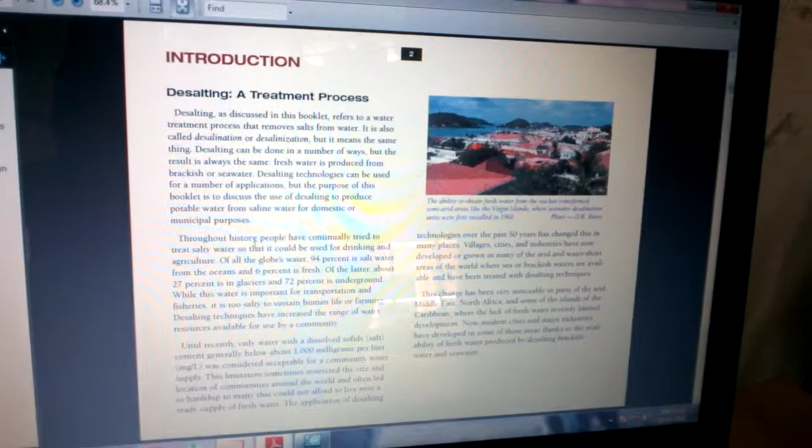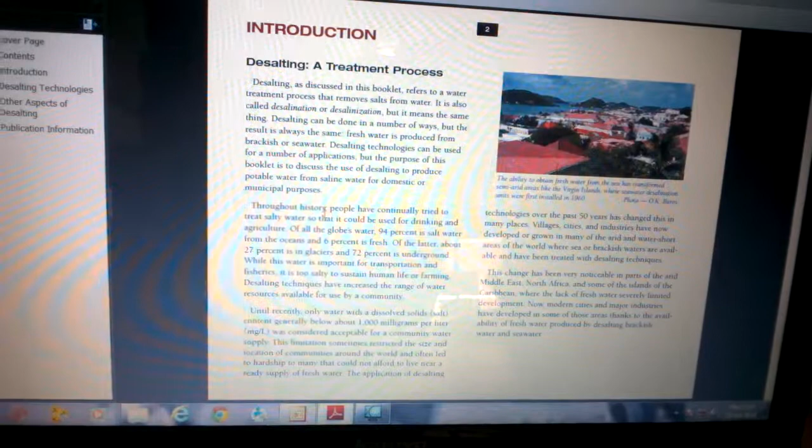First, see desalting technologies. What is desalting? Desalting is a method to treat the water that removes the salt from the water. It is also called desalination, but it means the same thing. Desalting can be done in a number of ways, but the result is always the same. Fresh water is produced from the sea water or brackish water.

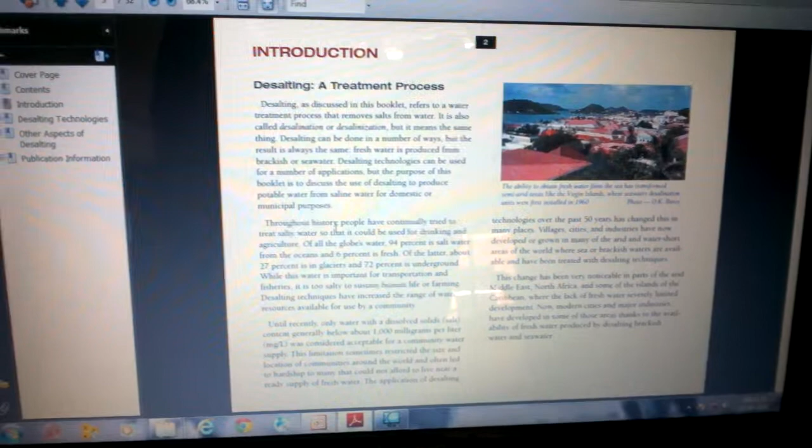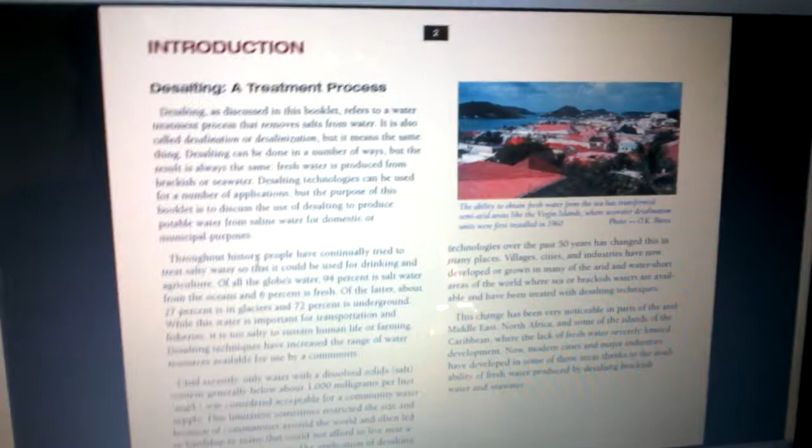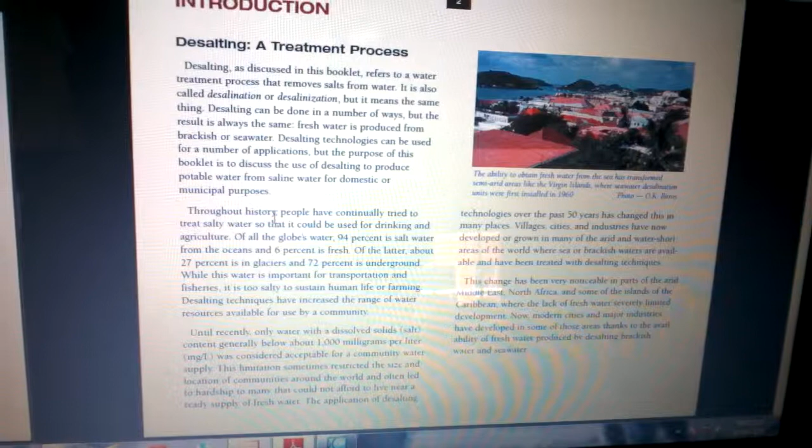Desalting technology can be used for a number of applications, but the purpose of this potable water from the saline water is for domestic and municipal purposes. Throughout history, people have continuously tried to treat the salt water so that it could be used for drinking water and agriculture. Of all the globe's water, 94% is salt water from the oceans and 6% is fresh. Of the latter, about 27% is in glaciers and 72% is underground.

Okay, then while the water is important for transportation and fisheries, it is too salty to sustain human life or farming. Desalting technologies have increased the range of water resources available for use by the community.

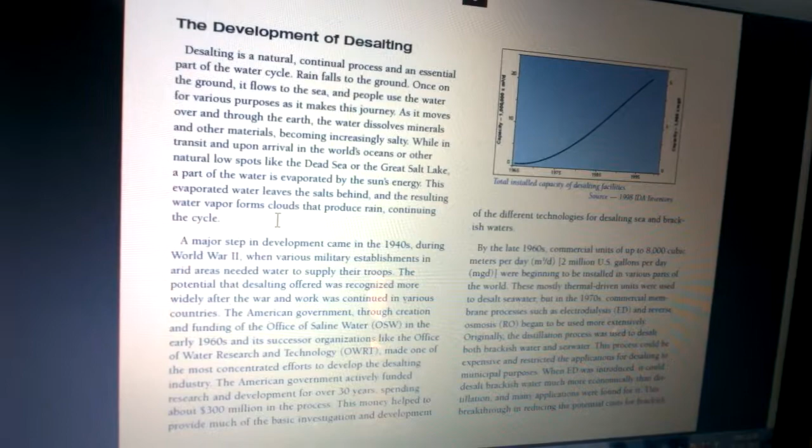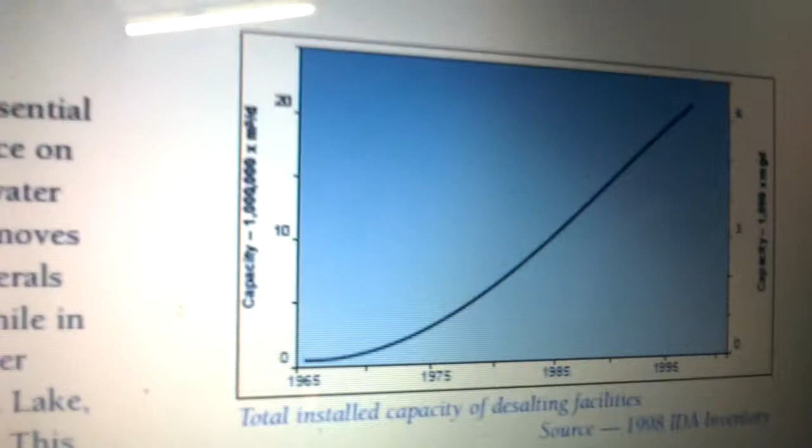Next, in the desalting process, the water cycle is very essential. I would like to say some words on the water cycle. Desalting is a natural, continuous process and is essential to the water cycle. Rain falls to the ground. Once it falls on the ground, it flows to the sea. People use the water for various purposes as it makes this journey.

As it moves throughout the earth, the water dissolves minerals and other materials, so it becomes increasingly salty. While in transit and upon arrival in the world's oceans and other natural low points like the Dead Sea or Great Salt Lake, a part of the water is evaporated by the sun's energy. This evaporated water leaves the salt behind, and the resulting water vapor forms clouds that produce rain, continuing the cycle.

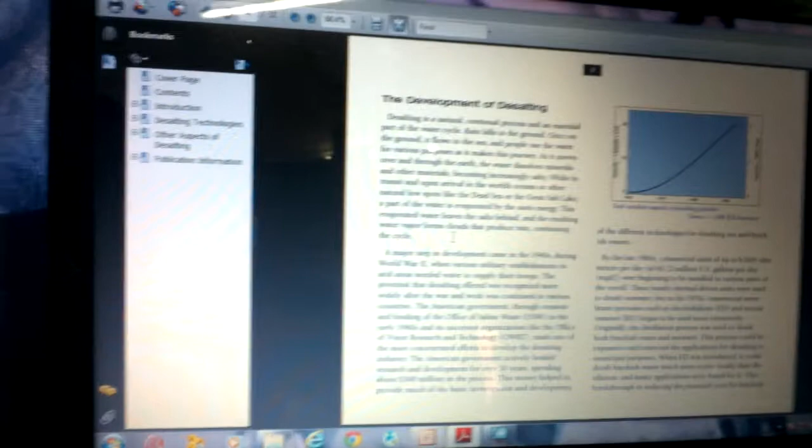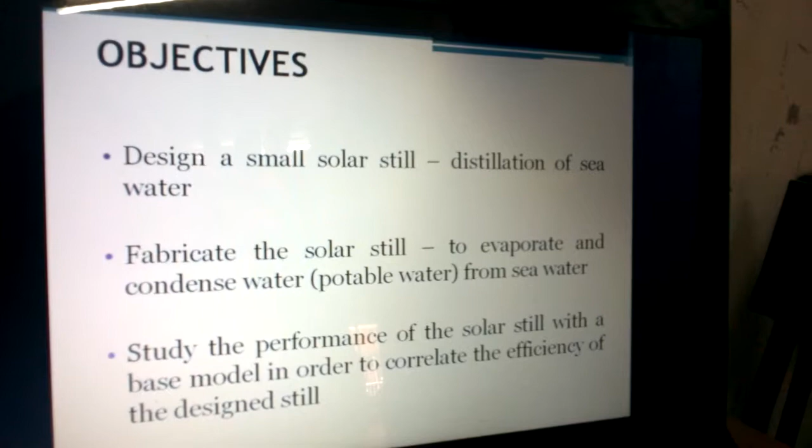Next, see here, our main objective is to design a small solar still for distillation of seawater. Our main concept is to design a small unit because it should be feasible for all people. Low class people, middle class people can buy it, install it in their homes, and produce the water by themselves.

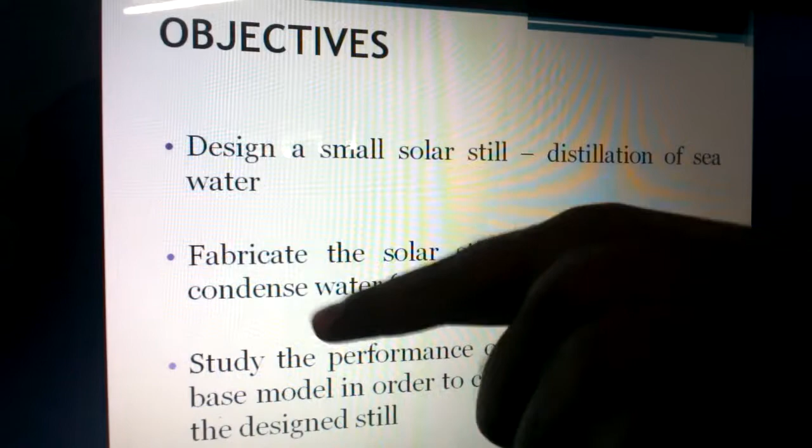Next one, fabricate the solar still to evaporate and condense water from the seawater. That means our project's main aim is to evaporate the salt water, and we can produce the pure water by the condensation process. So our main aim is to improve the rate of condensation and evaporation so that we can produce more pure water.

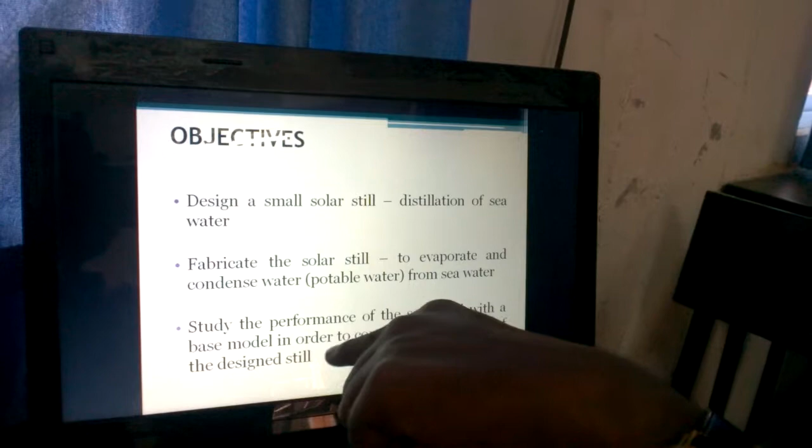Next, study the performance of the solar still with a base model in order to correlate the efficiency of the designed still. Our main aim is to design two setups. First one is the previous setup. It has already been introduced and installed, and used regularly. So we have designed the previous setup.

Next, we are designing our new setup. Finally, we are comparing the results to see which is the best, and showing the result. We are producing more amount of pure water. This is our aim.

So we fabricated the setup again and again, and we improved the result gradually. Next, the fabrication process was completed. After that we started to take down the readings: the temperature inside the setup, the temperature outside the setup, and the temperature in the output area. We noted many readings, and we did the calculation using the Mollier chart.

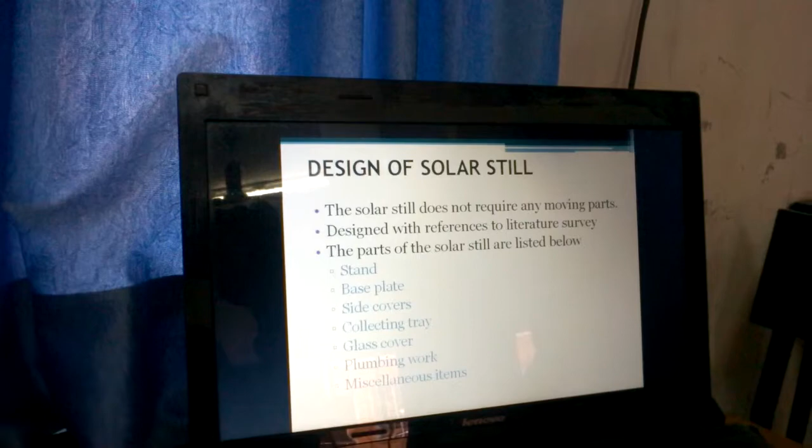Next, design of the solar still. First we completed the design part using CATIA software, as I said before. The solar still does not require any moving parts. Our design does not require any moving parts such as fans. And we designed the setup based on the literature survey, that means previous setups based on the same design, but we have included something different.

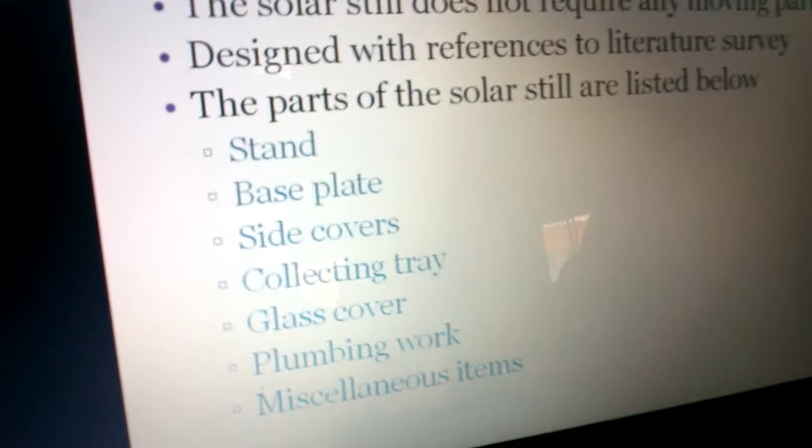The parts of the solar still. Our setup consists of many parts. First, stand; next, base plate; third, side cover; fourth, collecting tray; fifth, glass cover. Next, some plumbing works and hemming works, miscellaneous items.

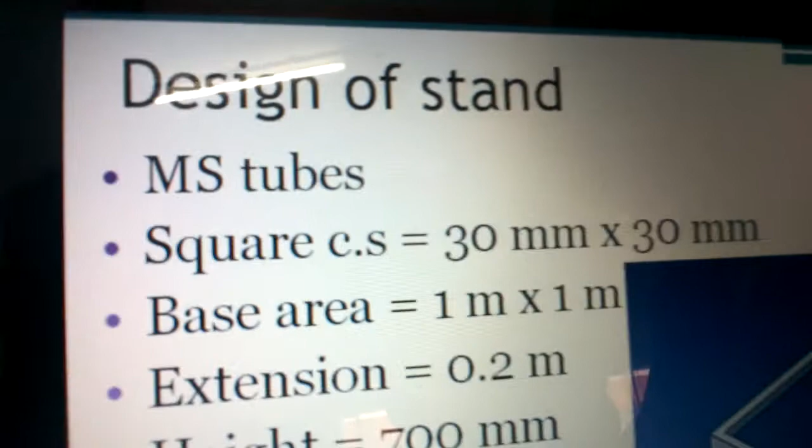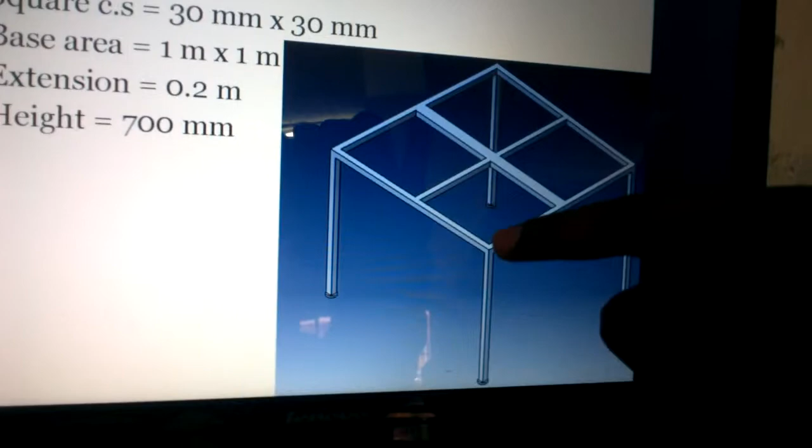Next, this is the base stand, which is made of mild steel square tubes, and the square area is 30 mm into 30 mm. Base area is 1 m into 1 m. Height of the leg is 700 mm. Here we did some extension work at the edges. We didn't show it here, but we did some extension work at the edges. That is 0.2 m.

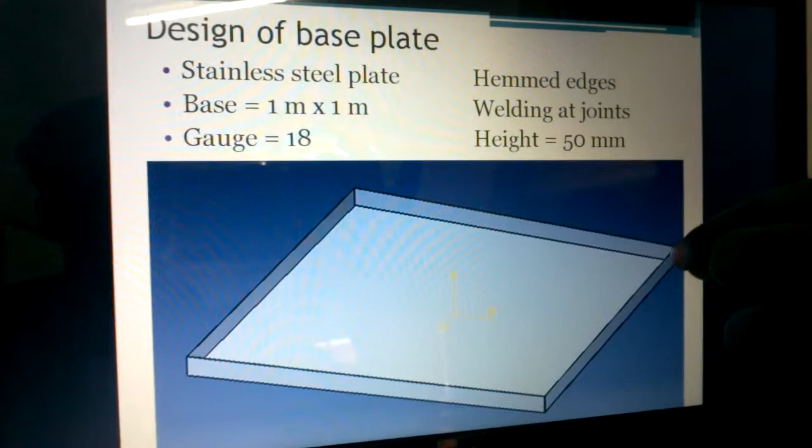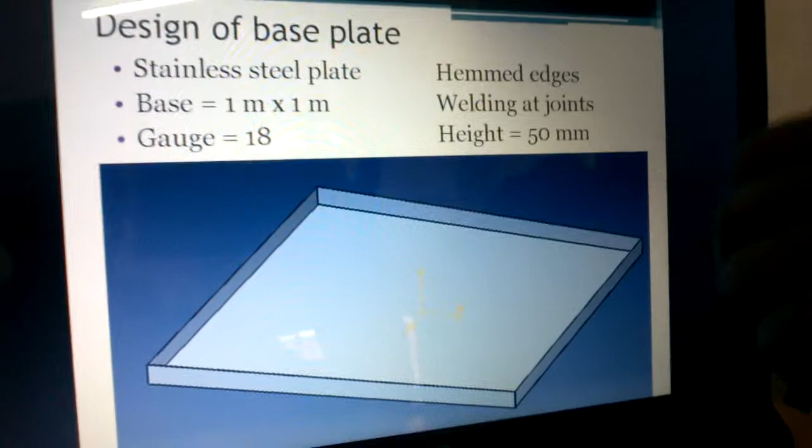Next, design of the base plate, which is made of stainless steel, and the edges are hemmed to prevent water leakages, and the base area is 1 meter into 1 meter. At the end, the edges are welded, and the height of the base plate is 50 mm. The thickness is 18 gauge.

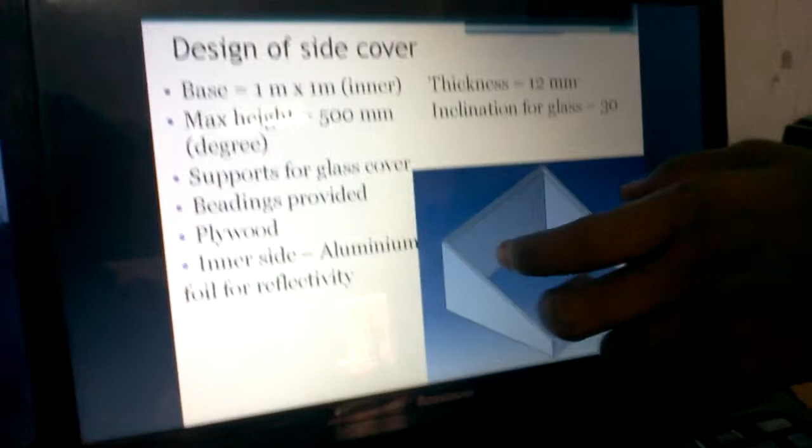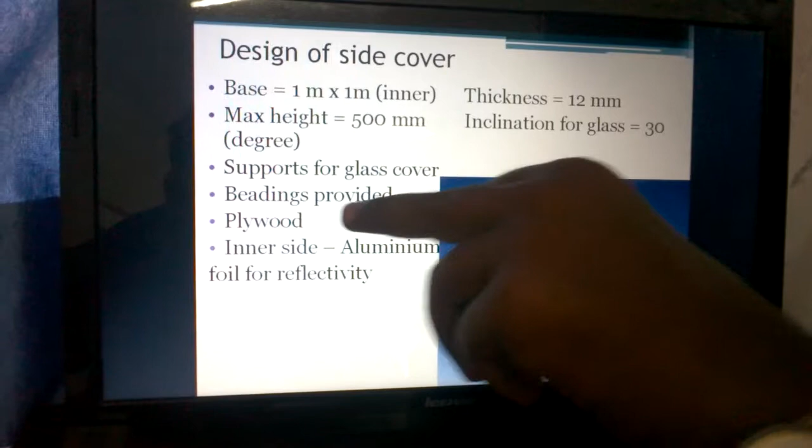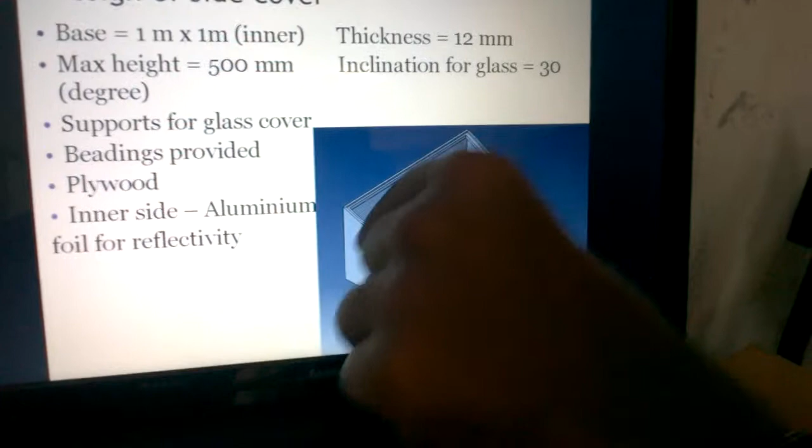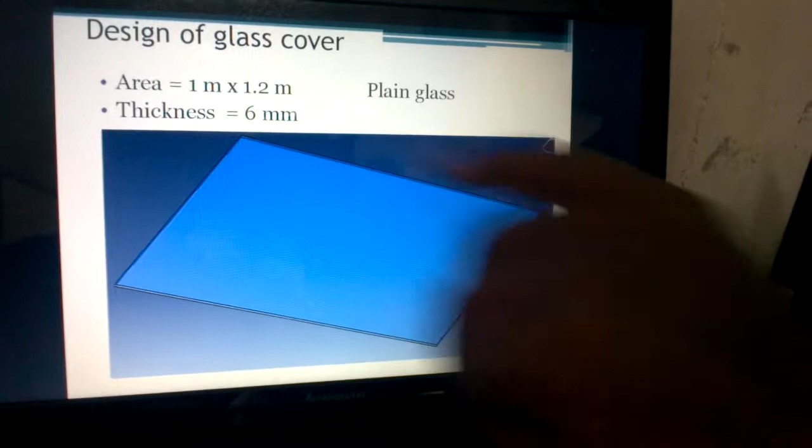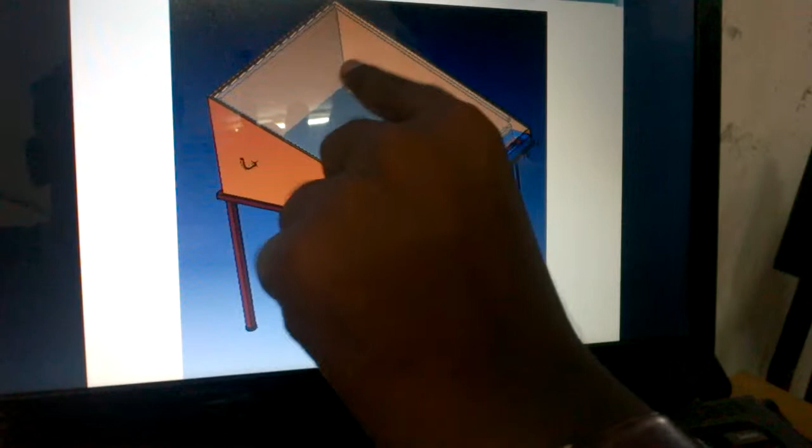Next, design of the glass cover. The area of the glass cover is 1 meter into 1.2 meter. Thickness is 6 mm. This is plain glass. This is our main setup. The solar radiation passes through the glass cover. This is the base plate. Here we have filled the salt water. The radiation passes through the glass cover and hits the water, so the water heats up and starts evaporating.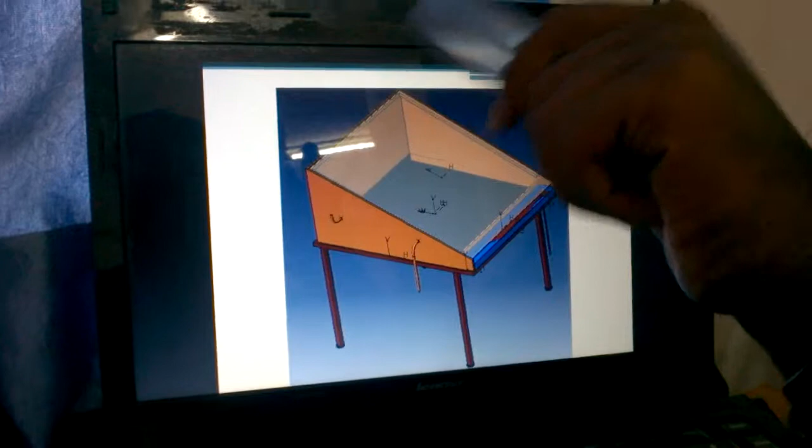Inside the side cover we have stuck some aluminum foil for reflectivity. So the solar radiation hits the inner surface of the side cover and reflects. The reflected radiation tries to escape outside, but it cannot escape because we have sealed the setup thoroughly, so it travels inside the setup. The water absorbs the heat energy, which raises the temperature, so that we can improve the rate of evaporation.

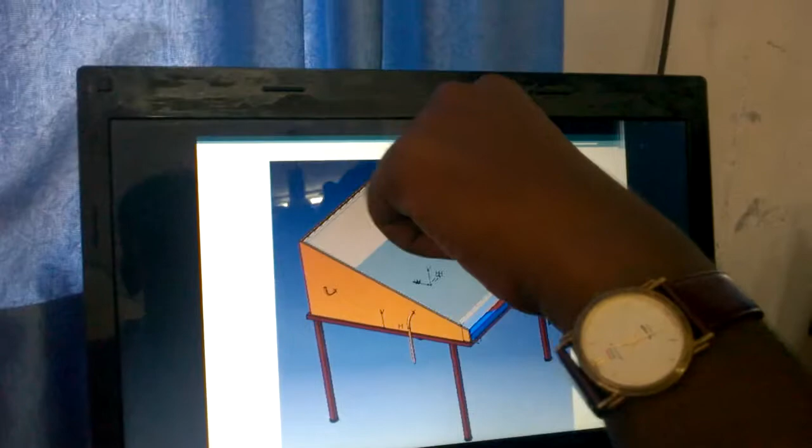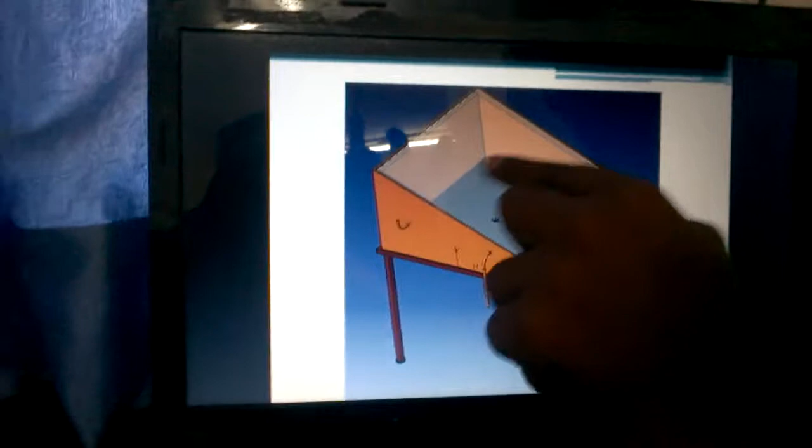The evaporated water vapor floats to the top, but it cannot escape outside. We have sealed everything, so it hits the glass cover. Here the temperature is very low, so the evaporated water vapor becomes pure water. Condensation happens here, so the pure water falls down to the collecting tray. Here we collect the pure water, and through this pipe we can store it in the storage tank. In this way we supply pure water, and this way we fill the salty water.

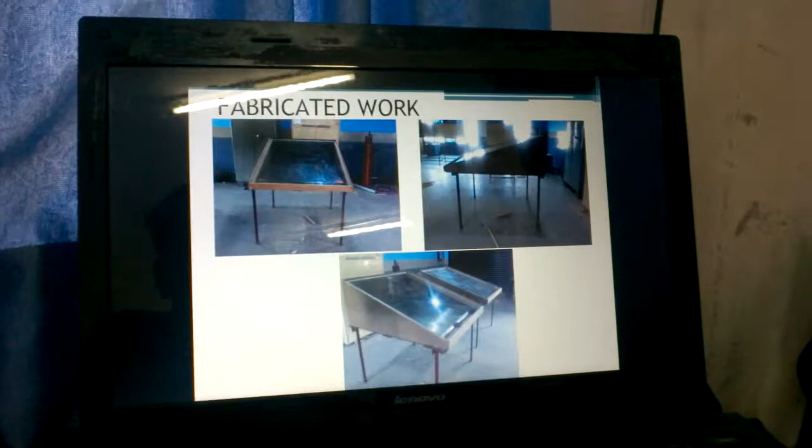This is a picture of our setup. We designed two setups, and finally collected the pure water and correlated them with each other. Thank you.